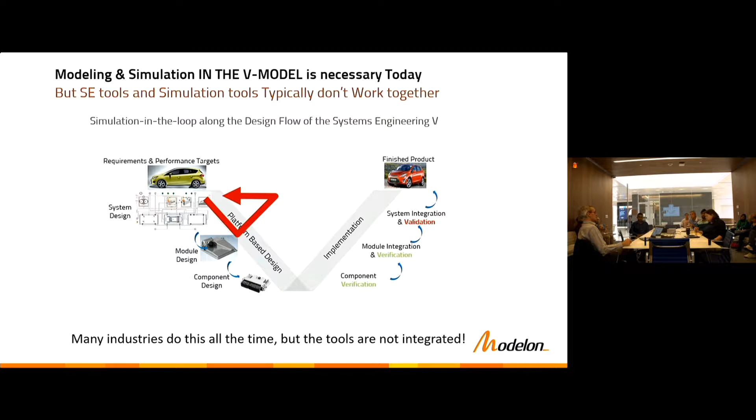So in each step of these, you have like a smaller V model in which you define your top-level requirements on that level of the system. You systematically build up a solution space of potential solutions. You use modeling and simulation to explore these solutions, and then you verify these potential solutions against the requirements. So that is a process that is done. But if we look at the supporting tools, you still have two completely separate silos, the simulation tools and the systems engineering tools. They don't talk to one another.

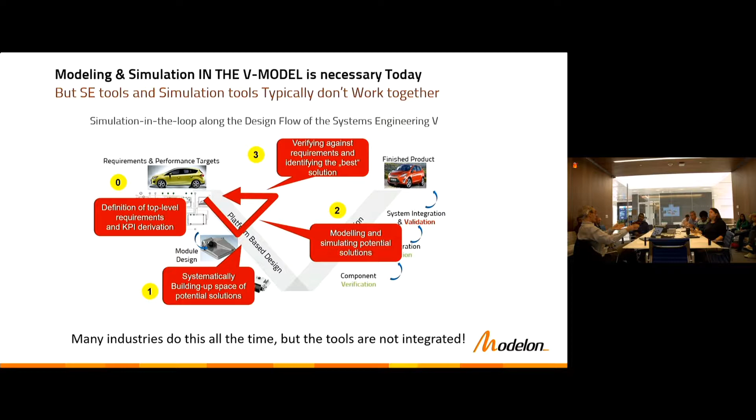So in terms of the building blocks of standards that I will talk about, Modelica is an open standard system simulation language. Just a quick raise of hands again. Who knows what Modelica is? And more than just heard about it. Okay. Who knows what FMI is? More than just heard about it. Okay, most. So I'll keep this short.

It's an object-oriented modeling language, non-causal and equation-based. You model in first principles. You really write equations, and then the equations are transformed into a form that is efficient to simulate and can actually be different types of formalisms. You can solve transient problems, steady-state problems. You can solve particular optimization problems that can be formulated as an NLP, nonlinear program.

And on the research level, we are working with and want to extend Modelica to even use mixed integer optimization problems. I mean, the language would allow that, but nobody up to today has really built a backend to do that. And it really supports multi-domain modeling, and it's really an open standard that actually works. And I can really talk about that. We have products that work on different tools giving identical results.

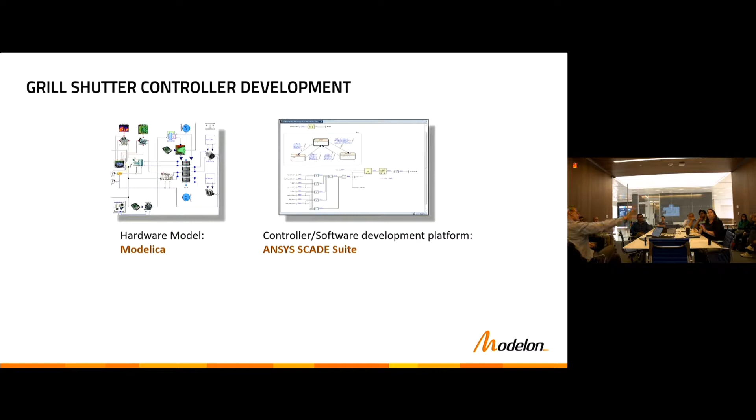So what you need to do that as a model-based design: you need a model of the hardware in Modelica. You need a controller software development platform. In this example, I took SCADE. I did the same talk with IBM people and used Rhapsody. You can choose whatever you want on the systems tool.

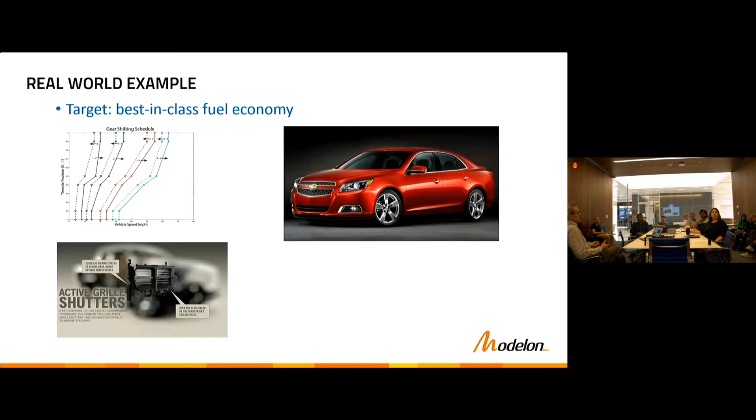I thought I had a little bit more. So the target, this is not the real vehicle. Target is some company wanted the best-in-class fuel economy and thought grill shutters will get us there. And you need active grill shutters that open and close depending on conditions. Fine. So they reduce the drag and improve fuel economy.

What's the standard approach with not model-based design engineering? You build the car. Yeah, you develop a prototype of the car, of the active grill shutters. You track test the prototype. And then they realize that the track test vehicle starts overheating. The grill shutter control didn't work. So actually what happened was that they made the car a lot more expensive and less fuel economic. It really totally failed. And then they asked us to figure out why.

What happened? Why did this go wrong? They needed new control strategies. They needed better integration. They didn't have that integration in their tool chain. They optimized the subsystem, but they didn't optimize the overall system.

So what they had was that the grill shutters closed too much, but they needed more air, so the fans blew as hard as they could, and then the fans were drawing electricity, sabotaging the fuel economy gain. Yeah, so grill shutters were closed, fans were blowing full steam, wrong controls, and boom. Yeah, higher cost, missed targets, everything wrong.

One of the reasons there was that they did not really look at the thermal part of this whole equation. You can look at the details of energy management in a vehicle at different levels. The highest level, you disregard the temperatures and simply say, look, all the temperature control loops are doing what they need to do and supposed to do and will regulate the right temperatures. We don't care about that. We only look at electricity and fuel. And we forget about temperatures. And that tool chain didn't have, and so that's how it failed.

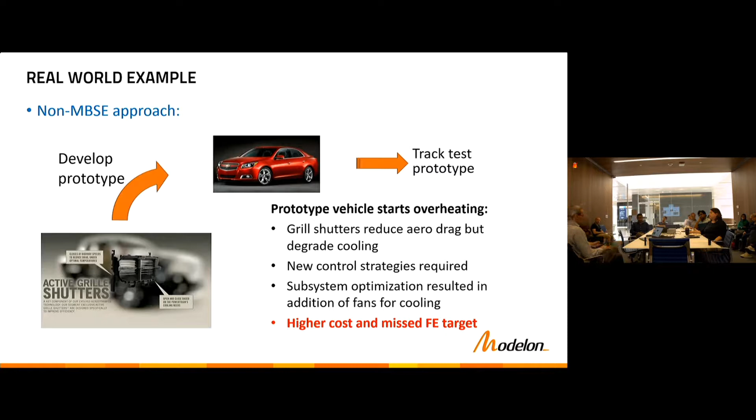So how would you do that with model-based design? Well, you build a model, of course, including the temperatures this time, and you define the requirements of what you really need. And the most important one is better fuel economy. You develop a model, develop test cases, and then you define requirement monitors. You need to check whether your requirements are fulfilled at every design iteration, right?

When you do your initial grill shutter design, you need to check that you don't overheat. Yeah, and that these interactions are actually taken care of. And so you need to find the requirements violation before you build the first prototype and catch the overheating issue before you invested into building a prototype vehicle. I don't know what they cost, but they cost seven digits per prototype vehicle, easily. Yeah, millions. And then you improve the system design and check these things out before you commit to hardware. Fine. So now in more detail.

I have a question. Yeah? They missed the requirement to begin with. So how is the MBSE approach helping? Well, they did have the requirements. The process really didn't combine the thermal requirements. I mean, their models weren't good enough. Their thermal models were really separated from this fuel economy model.

The automotive industry is actually fairly advanced compared to other industries in model-based design. They simulate a lot. That particular company didn't have good integration on that side. There can be a separation between the powertrain people. Big car companies are extremely siloed. So the fuel economy is with the powertrain department. Yeah, they look at the engine, the gearboxes, and all these kinds of things.

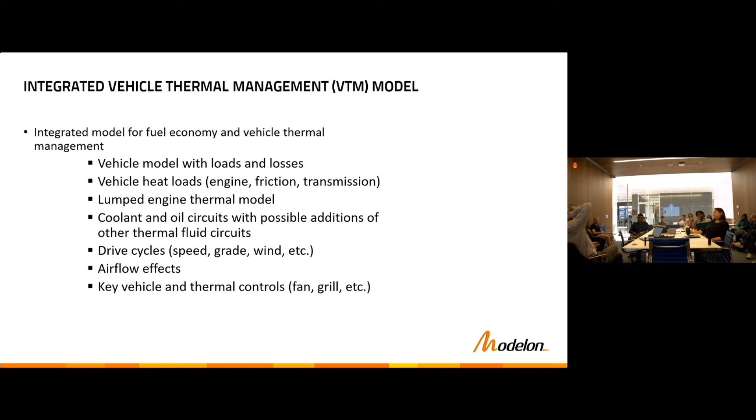So we have standard model libraries for this, where we use the vehicle dynamics library for the whole vehicle perspective, liquid cooling library for the liquids and fluids, heat exchanger library for details of the heat exchanger design, and engine dynamics for the engine. But let's skip over. Actually, the model is not super complex. Every subsystem you still want to capture as simple as possible.

We try to not have the most complex models, but really the adequate model, because otherwise your design iterations are going too slow. If your simulation always uses CFD and takes 48 hours to complete for a drive, people don't do CFD on drive cycles. You can't. It takes too long. It's not useful for design iterations. So you need to find the right level of model.

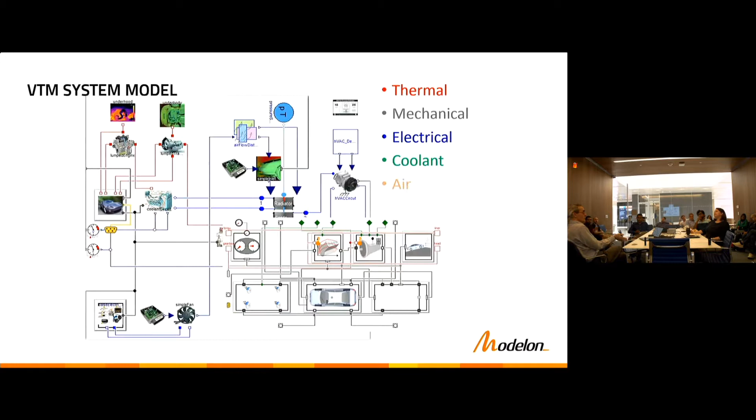And so we have basically hierarchical models where we can zoom into the aspect that you need at a time. So on the vehicle dynamics level, we don't need anything of the 3D movement. So in the vehicle dynamics library, we have simplified levels with 1D dynamics for the motion, which are good enough. And in the same library, we have highly detailed 3D models, which you could put into a motion simulator. But you wouldn't use them for thermal management. That doesn't make sense. You need drivers and drive cycles.

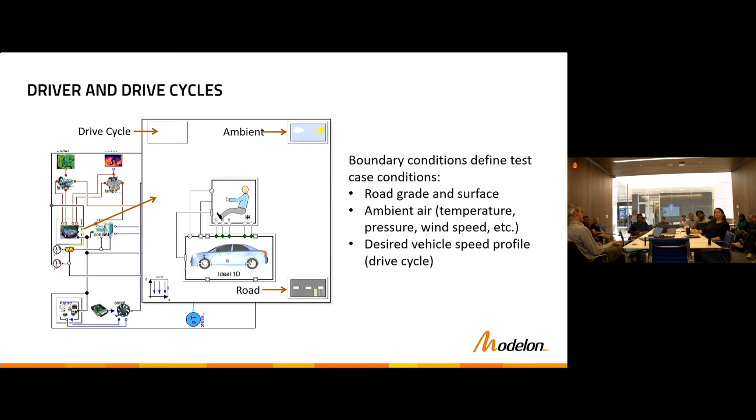So we have basically a way where we actually model the human driver in the car that follows the input from the drive cycle in some way, and the vehicle, the physics of the vehicle, they might or might not allow you to follow the drive cycle precisely, but that's all in standards on how close you need to follow. Typical results, they look quite bad. So here, this is the speed of the vehicle, this is the engine speed. So those are actually fairly complex test conditions to verify whether or not systems work.

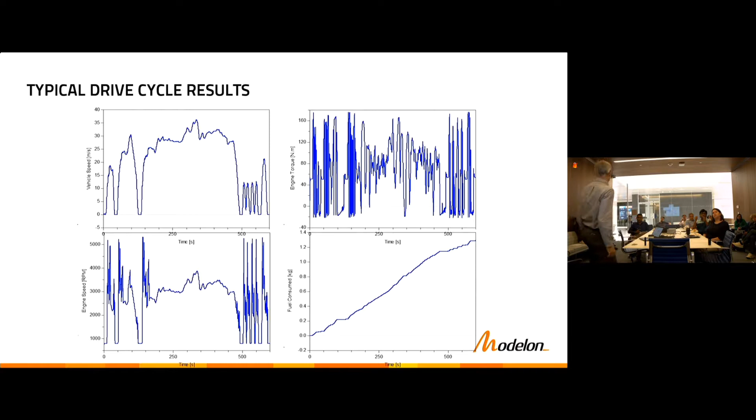Here's typical results. Here we have a boundary temperature, and we can see that this is violated here. But this temperature, this 95-degree temperature, you're allowed to violate it for up to 3 seconds or 5 seconds or something like that, right? So this is still okay in that sense. So the fan speed is low when the vehicle is fast, because you use the speed of the vehicle to cool, etc. Thermostat opens as the engine warms up, so the thing behaves roughly as it should. Yeah.

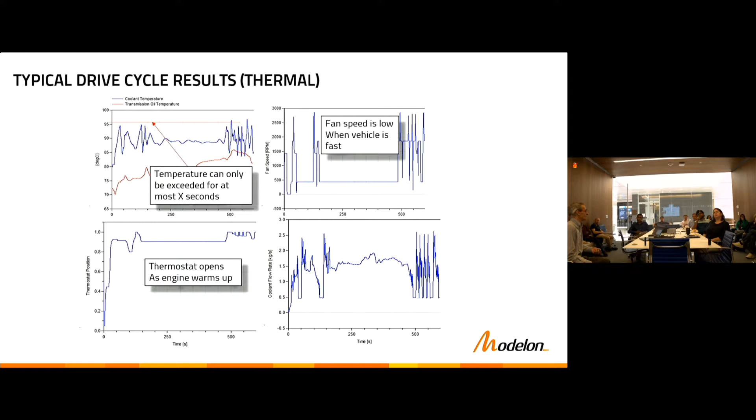So how do you integrate such a model with a requirements design, and how would you want to do that? The requirements, they evolve some way. They are grounded in something that the product design people call the voice of the customer. What does the end user want? Do I want a $2 million hypercar, or do I want a car that absolutely is for less than 20K and still does what I need to do? And they are really quite informal and imprecise, you know. I mean, some people want a particular sound from their vehicle, and people definitely like a particular smell of a new vehicle, and these things are designed these days. You won't believe it.

But from this very informal thing, you can get into something that is very complex. So for complex and maybe safety-critical systems, this can evolve into something that in itself is very complex. So if you've ever seen requirements for an aircraft subsystem, you know, they hit you like a brick in the head, because it's a stack of paper this high. It's thousands of requirements, and they better make sense altogether, right? They should be correct, consistent, complete,

all of those. And so you have for requirements this problem that they need to evolve from the concept, you know, I need the next generation single-aisle aircraft, the follow-up of the Boeing 737, whatever, and looking at what customers want from such a plane, to this document that better be correct. And I think there's a lot in that journey that is still quite open on how to do that well, and people are not up to speed with model-based design the way it's done today.

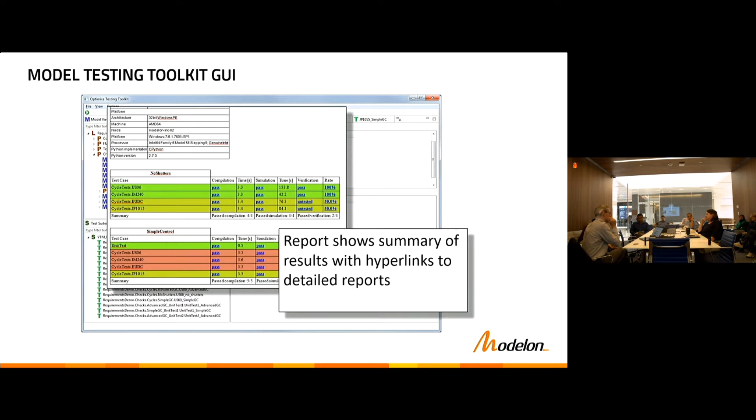And if your requirements existed in DOORS, can you bring them into Modelica, or do you have to write them from scratch? No, there is no way yet. That is really one of the problems. This is closing the gap. And it's a prototype. So I work with a Spanish company called The REUSE Company, which has, in my view, really the currently best tool for working with natural language requirements.

They are not well known in the US. They are quite known in Europe. Airbus used them to design the A350 with hundreds of people there. So it's used in relevant industries. And what they have is that they work with ontologies, so that you write natural language, but the language is checked against the ontology.

They have a minimum quality requirement for every sentence that you write there, and you can't press return when your requirement is not in accordance with their rule set. Then there is the issue of consistency of requirements if you have many requirements; an A350 gets into the many thousands. You can't check them in real time.

So they have both a real-time mode, checking things you can check in real time, and a batch mode where they tell you the next day, wait, that requirement that you wrote there is contradictory to the requirement that your colleague wrote over there in that part of the system. You need to redo it.

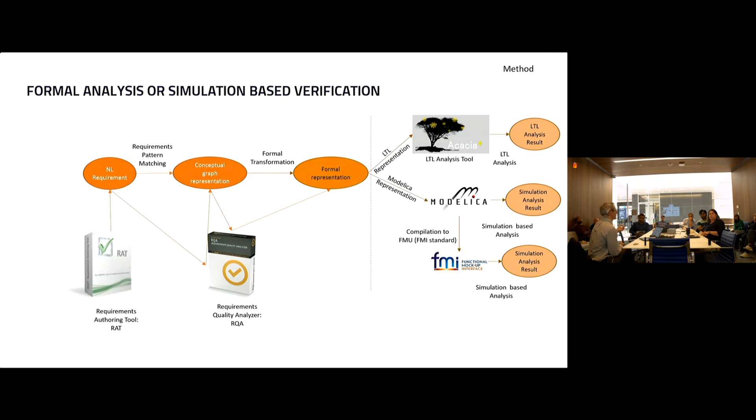So you have natural language requirements, use pattern matching to get a graph representation, and then observe. This was just an error; you should have seen that whole picture. And then you do a formal transformation. So I will skip this, but that is natural language, and it's translated into linear temporal logic, and that temporal logic then can be analyzed, and you can figure out whether there are contradictions and stuff like that. So now this would all be pretty nice, but this is seriously prototype level.

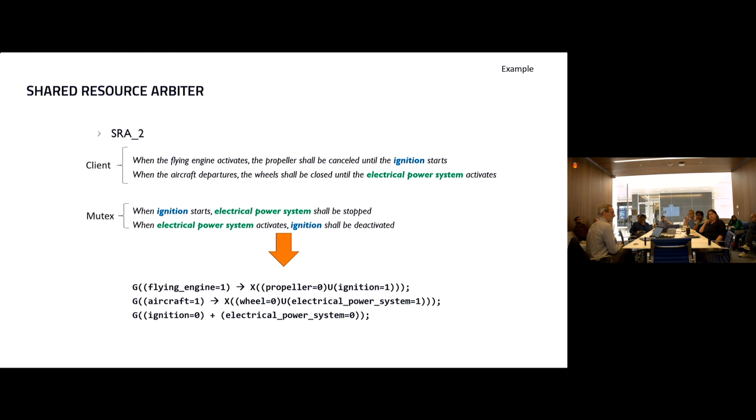I mean, you can talk to these guys. The guy that's the CTO is also a professor at the University of Madrid and doing research. So he's probably a good guy to invite if he finds time.

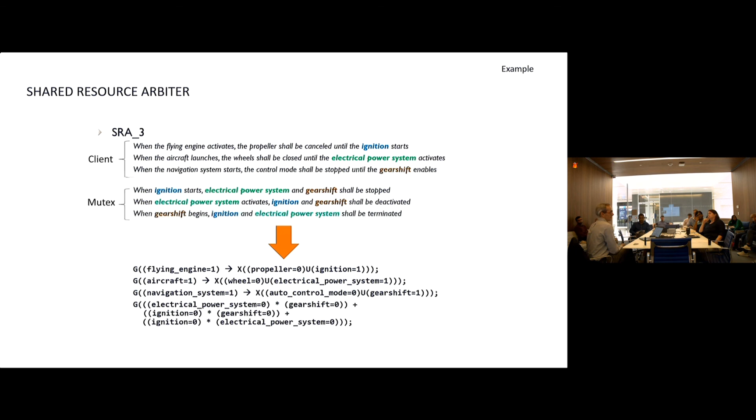I'm a little bit late, but I can give you this presentation.

We can use Modelica to make requirements executable. At the moment, everything we have done has never used this automated process from natural language. We rebuilt the natural language requirements in Modelica, but we still gain a lot from that because it automates the design process a lot. And so there are initial ideas of doing this transformation from natural language into something formal for formal or simulation-based verification. But there are still many missing links and open questions, I see.